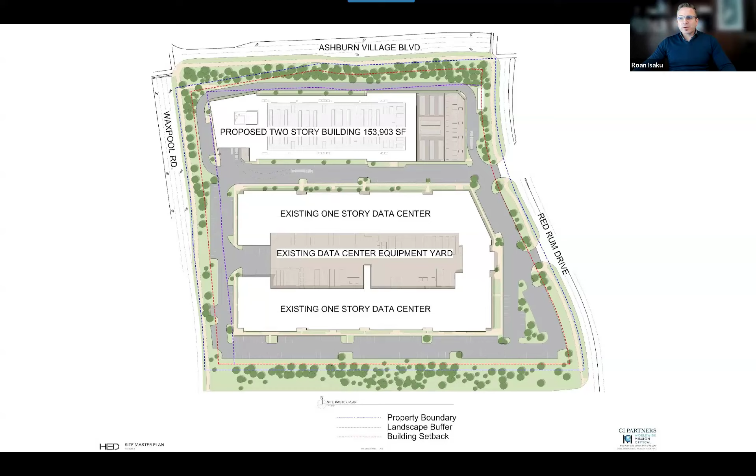Some of the challenges: overall the site is very small, so every design move was heavily scrutinized to determine if it would work and fit. There were many visible and invisible constraints on the site, setbacks, easements, ordinances, and other site requirements, which made meeting the project's design goals a challenge. The equipment yard, for example, was very small for the amount of equipment and routing of electrical cabling, underground as well as overhead to the electrical rooms. Stack generators were a challenge due to space limitations and height limits.

Here's a perspective of the entrance to the building. The concept design that was approved by the county before we had fully engineered it was approved before everything was figured out, basically. So we were held to stay within what was approved, both for the site and for the architecture. This site, as you saw in the previous slide, is at the corner of that major intersection, which is also considered the gateway into Data Center Alley in Loudoun County.

That part of the county has a very high concentration of data centers. Most of the internet traffic within the US passes through one of those buildings. Because of that prominent location, the building design had to be more than just a typical data center.

Balancing costs, client expectations, and the level of design required to meet and surpass county approvals were significant challenges. Coordination across multiple disciplines using Revizto was done on a regular basis, and continues to be done regularly for visualizing progress, not only for the design team internally but also with clients and stakeholders in weekly meetings. Then tracking design issues and other issues.

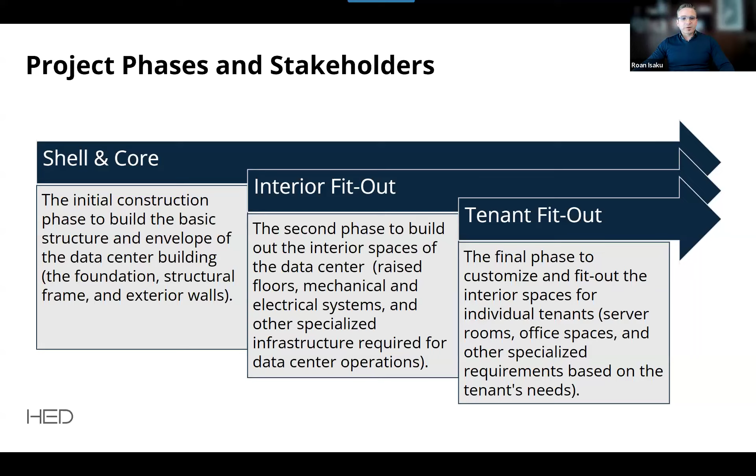And then they in turn lease that space to tenants that will use the data center. Those tenants are responsible for the TFO, the tenant fit-out phase of the design—yet another layer of customization based on their unique requirements and standards for handling data. So we've got three phases, three sets of stakeholders involved in this building: the developer, the data center operator, and the tenant. And for us at HED, that means three projects that need to function as one. And the BIM setup, as we'll see in the coming slides, is driven by these requirements.

So first off, our project setup has to align with accounting. We have three clients that have to get set up as three projects for billing and tracking time purposes, and that means three sets of Revit files, with five discipline models per set. All of those get interlinked together. The core and shell files get linked into the IFO files because you're developing the IFO over top, with core and shell as context. The core and shell and IFO both get linked into the TFO, as well as in reverse—so TFO gets linked into IFO, so you can refer to the TFO as you're developing the IFO, and also TFO and IFO get linked back into core and shell.

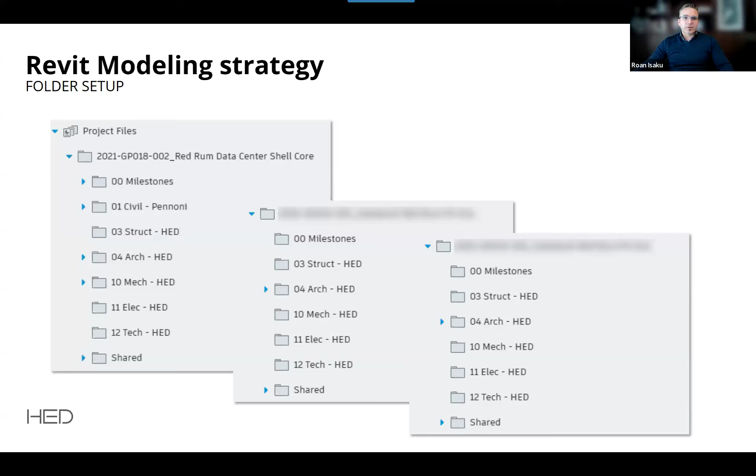There's a lot of linking going on, and our preference for linking in Revit is to live link. So by default, all of our projects are live linked, and to accommodate that within the Autodesk cloud infrastructure in ACC, all three of these are on the same ACC site.

And then each model—so phase mapping is key, right? There are three phases per project per model. Phase mapping is key, and to minimize complications with phase mapping in Revit, every single one of the models gets these phases: existing, phase 1, phase 2, and phase 3. Not all phases would contain geometry, depending on what model they're in. For example, in the TFO models, you wouldn't be modeling anything in the core and shell or IFO phases, et cetera.

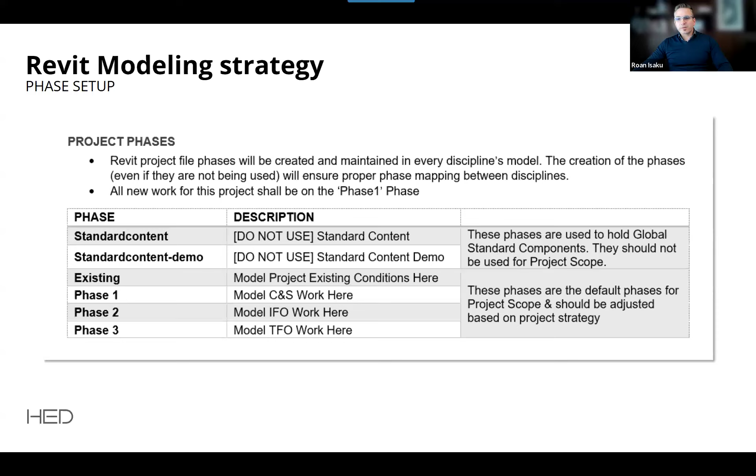The message in the slides is about the significance of teamwork and open communication and proactive problem solving, which, by the way, is our secret sauce at HED. We're more than just a multidisciplinary team—we are an integrated team. That's the key to our success, which hinges on fluid, effortless communication and coordination, meant to go beyond the formal review activities, which I'll briefly cover later. It requires active participation from all of our team members on the project. If you see something wrong, flag it, report it, call the responsible person, escalate it to the project leadership, or create an issue in Revizto.

But don't sit on it. A coordination failure in any one discipline affects the entire project—if one of us fails, all of us fail. Multidiscipline visibility is crucial, and our entire project ecosystem in Revit and Revizto is set up to support and promote that.

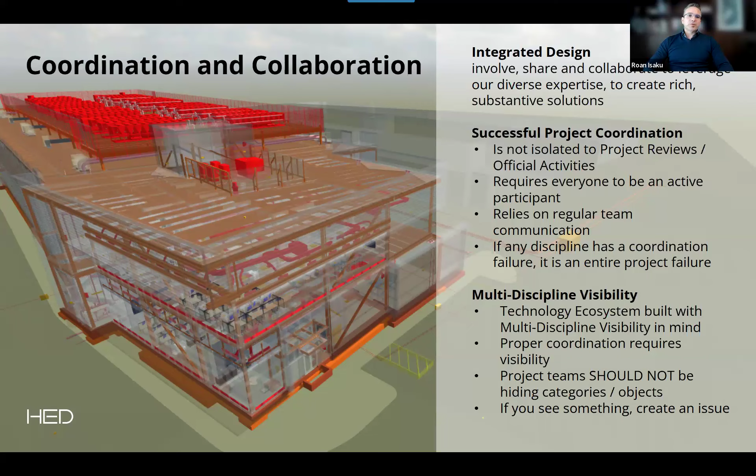Each active project gets exported to Revizto on a schedule. We have a series of workhorses, computers that sit in the server room, and their sole purpose is to publish Revit files to Revizto outside of working hours. Most projects get set up to export every other day—either Monday, Wednesday, Friday or Tuesday, Thursday, Saturday—whatever sequence best aligns with their weekly meetings. However, there are fast-paced projects at the firm which require daily exports, and as of the latest version, the Revizto export scheduler also allows for multiple schedules on the same workhorse, so you can export something more than twice a day if you had to.

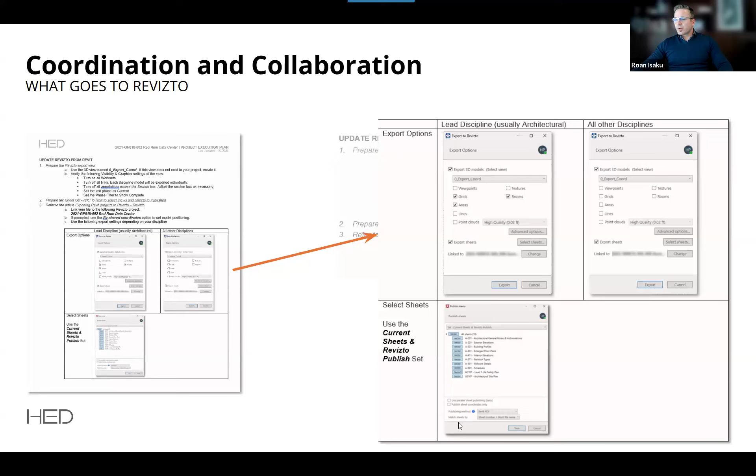All right, and then once in Revizto, there are numerous ways to navigate. There's great documentation and instructional videos on Revizto's website for this. My personal preference is the map tool, which is what I clicked on to get to this screen.

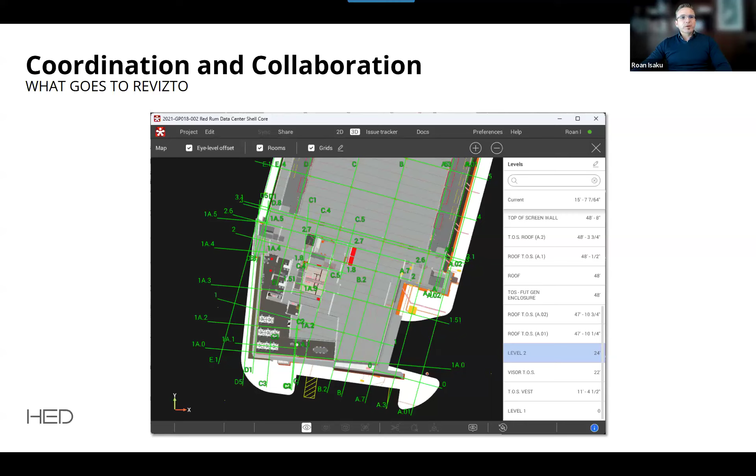In here, you can set the level on the right side, level 1, level 2, level 3, and then navigate to a room or place in the project and double click to get teleported to that place, and then begin your review process.

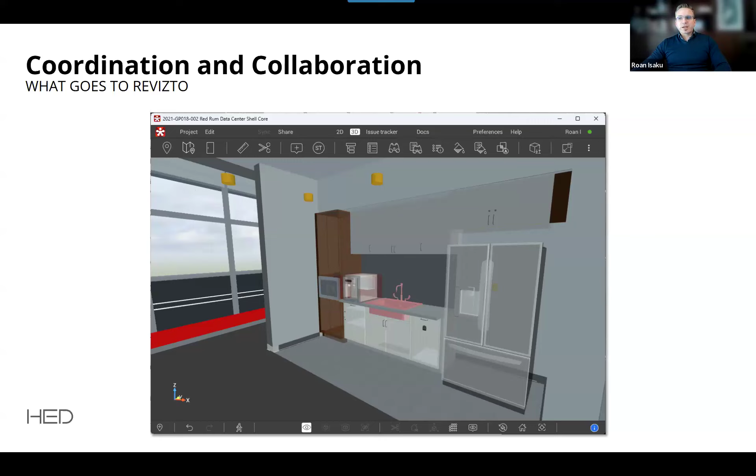As a starting point for us at HED here, we have a consistent color template for all of our Revizto projects. Each discipline is given its own color, and yellow here obviously is electrical. You can see by the lights and the receptacles. And red, this little radiator here, is mechanical, and salmon is plumbing, etc.

Just a quick warning that walking through a project can be a lot of fun. It's kind of like playing a video game, if you want to think of it that way.

And create issues and review things, but you should check with your teams first on progress. So, for example, in that previous view, if the electrical team had not completed the placement of power receptacles, they just weren't at that stage yet, it would not be very valuable if I walked through and noted all the places where they were missing.

We know that they're missing because we have yet to place them. So plan your review activities for after the work that you are reviewing is completed. Or if you're seeking a review, let the team know once something is complete and ready to be looked at.

We have a stamp for that, as a matter of fact. We'll get to that later.

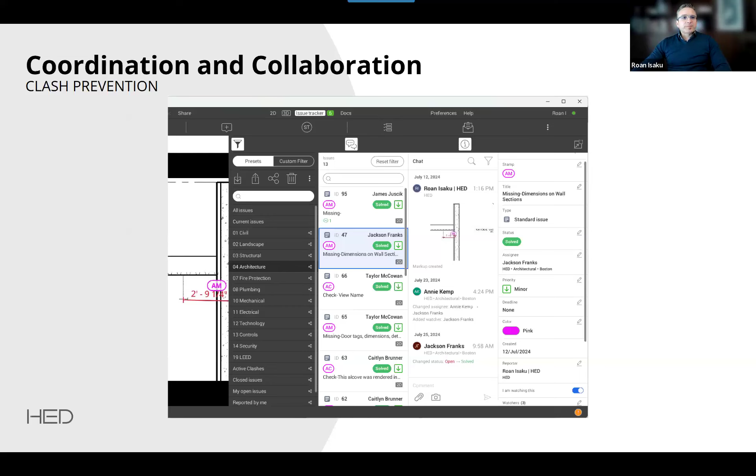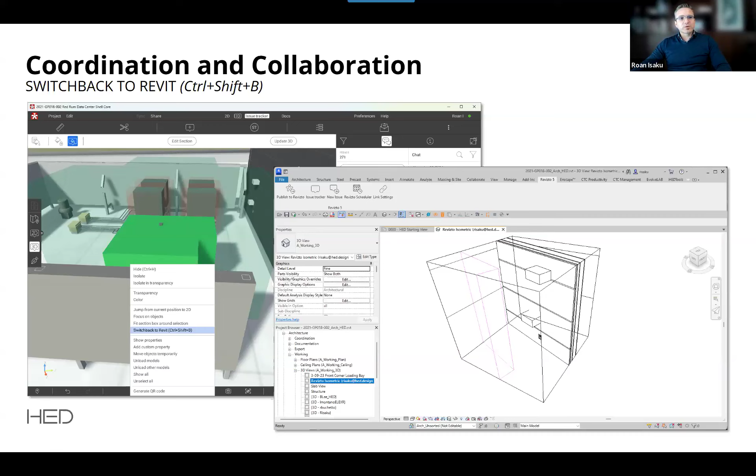Another very nice thing is the switchback feature in Revizto. Control-Shift-B is a very popular keyboard shortcut. You push that, and with Revit open on your other screen, it creates a Revizto isometric view with a 3D section box around the area where the issue is, so that you can immediately get to resolving it.

We have stamps for clash prevention as well as clash detection. Clash detection is for quality control, just in case a team or project would benefit from it. Let's say you've got a project with a very small atrium space, very tight constraints - it's a good way to check your work.

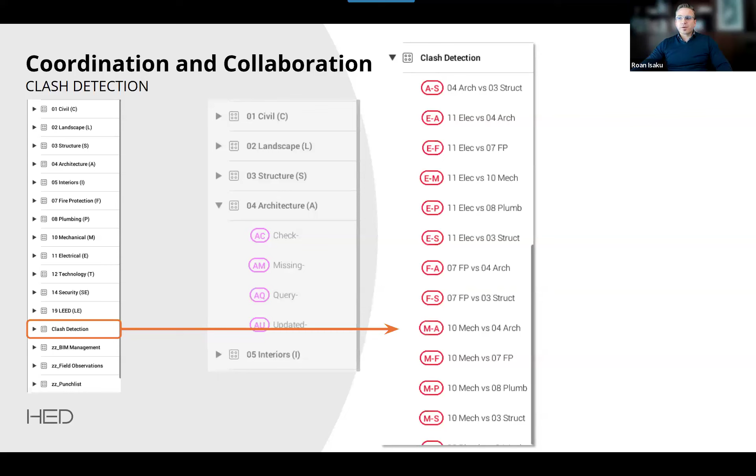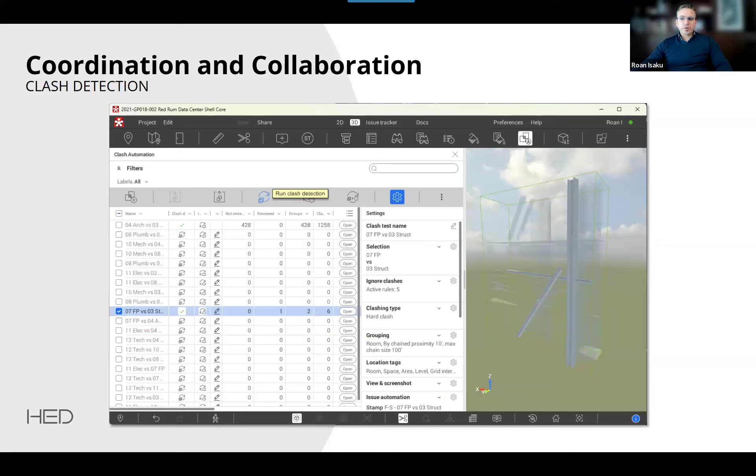As far as clash detection, Revizto sets itself apart, in my opinion, by making this process incredibly easy. In this platform with this interface, each discipline is able to run their own clash tests and do their own QC for the model. Once a test is run, each clash or group gets reviewed.

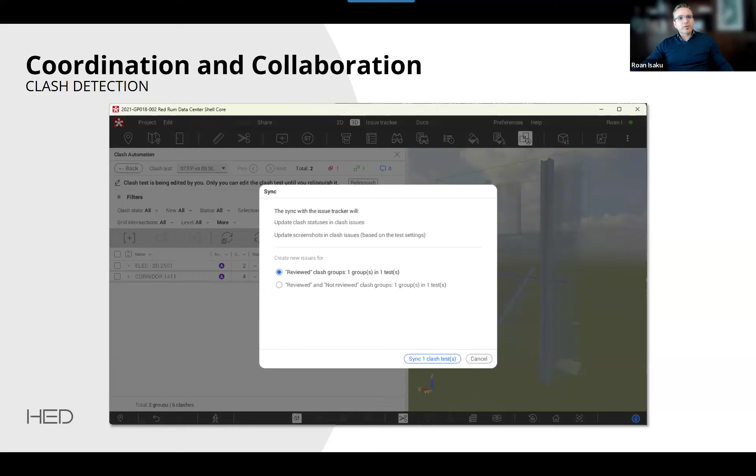Once it is reviewed, it can get sent to the issue tracker, and there is a stamp associated with it, as we saw before. So it would get automatically assigned to Matt in this case, and then Matt could open up Revizto with Revit on his other screen, Control-Shift-B, and get to work.

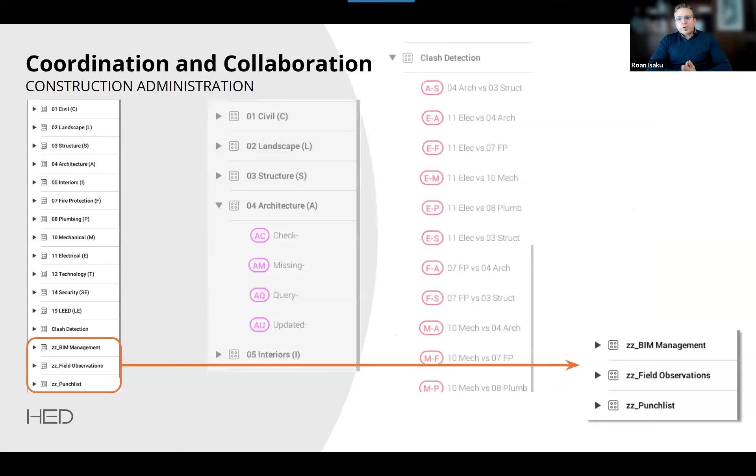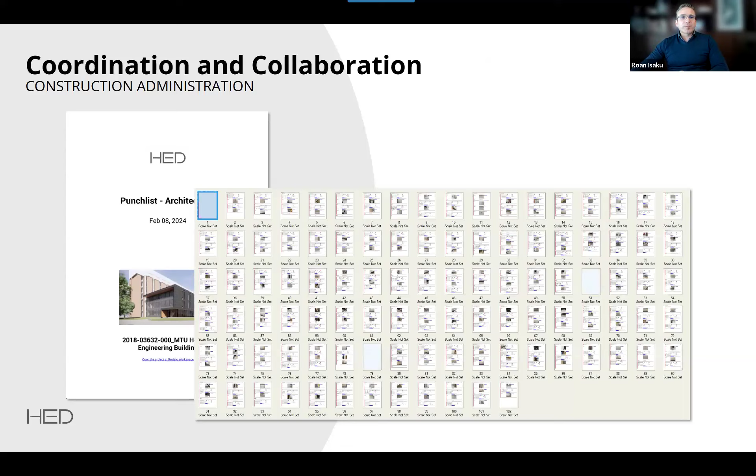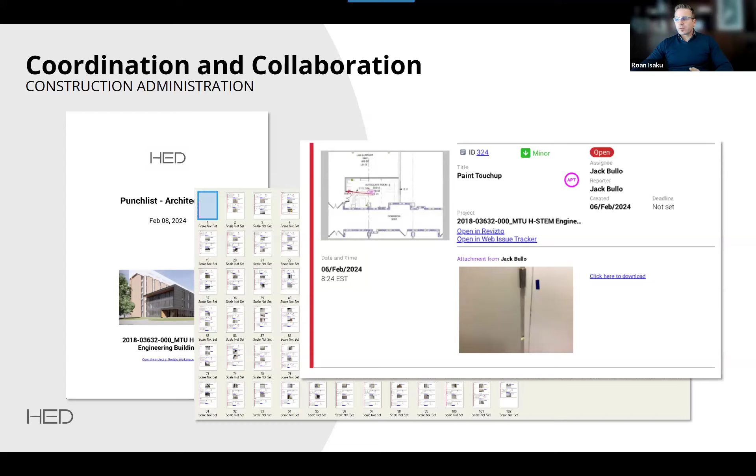This is a 102-sheet page PDF with, as you can see, about 2 items per sheet, so 204 punch list items that this architect walked the project for with an iPad and Revizto, in 2D mode, set to a plan sheet. He tapped on the plan to create an issue, took a photo, and then came back and produced that 102-page report.

This is a quote from Jack Bullo, who was that particular architect. Jack, by the way, is a very senior designer here, very talented, but he's someone I lovingly call a person with gray hair - an old school kind of person. Which speaks to the very low barrier of entry, in my opinion, to most of the tasks you might perform in Revizto. If you can use onion skin, you can do Revizto, I guess.

So, Roan, I wondered if you didn't mind if I chimed in here. You brought up a really interesting point about the quick, nimble graphics of Revizto and how you can kind of get lost in that sense. I think that's something, maybe in comparison to Revit's 3D capabilities - Revizto is built on a gaming engine, right? So those just quick interactions with the BIM model. Anyway, I wanted to chime in quickly.

I thought that was a really interesting point, that maybe you could do some pre-planning before you get into a coordination meeting, or the room-by-room review that you mentioned. So anyway, just didn't know if you wanted to expand on that a little bit.